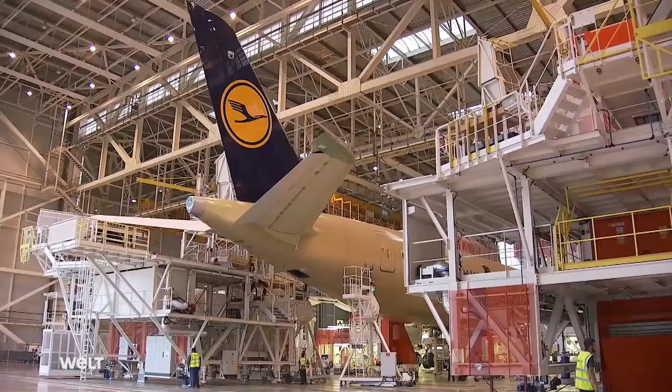Air travel has become an integral part of our everyday lives, connecting the people on our planet. For some years now, competition among airlines has been increasing, competition in which modern super airliners play an important role. The Airbus A350 is one such super airliner. Germany's largest airline has already ordered a significant number of these new long-haul aircraft. But can the airliner meet the high expectations?

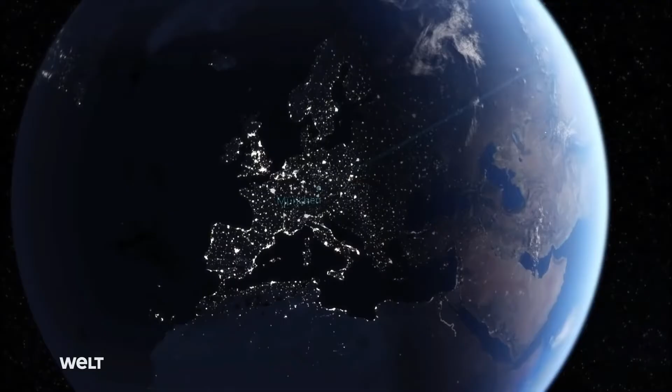The A350's first official flight goes from Munich to Hong Kong. The high-tech jet now has to prove itself under real conditions, a direct flight and a stress test with a duration of 12 hours. It's the most modern commercial airliner on the market.

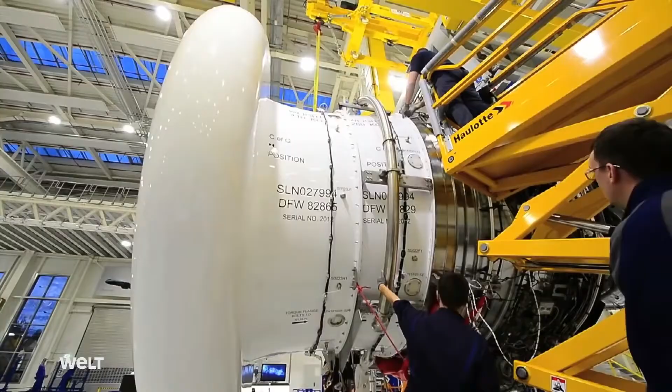The engines from Rolls-Royce have been completely redeveloped and enable the aircraft to carry out extreme flight maneuvers. We'll be pushing the aircraft to its limits here. On a test flight, the new A350 is rolled to a bank angle of 67 degrees.

There are also improvements for the passengers. More space and larger HD monitors are just some of the features. But the current super airliner from Boeing also has a lot to offer: new, larger windows and a completely new lighting concept for passengers on the 787 Dreamliner.

London to New York in only 3 hours, possible only by flying at twice the speed of sound. But that's only the beginning. In the near future, even flying drones will help alleviate the traffic chaos in our cities. And developers are looking even further into the future with their concept plane, an example of what the future could look like. This future, we will build it together.

The super airliners for the new millennium are ready to hit the skies.

The Airbus factory in Hamburg. The city on the River Elbe is the third largest construction location for civil aircraft in the world. Around 12,000 people work here in development, design, and final assembly. Besides other aircraft, 2 super airliners are being produced on the 19-square-kilometer site.

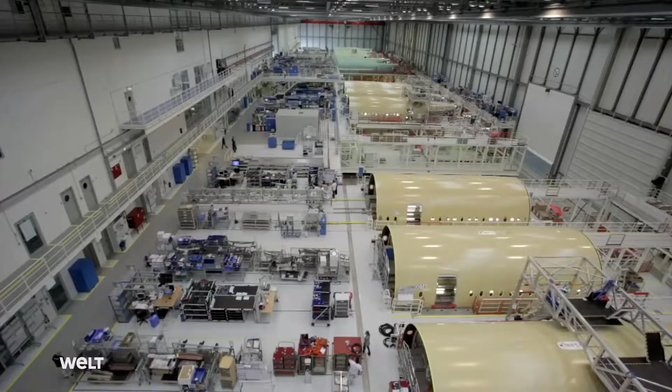The biggest passenger aircraft in the world, the A380, and the new long-haul jet, the A350. There was even a new assembly hall built especially for their manufacture. Here, the mechanical and electrical systems are installed for 2 fuselage sections: the forward section, which starts behind the cockpit, and the rear section behind the wings.

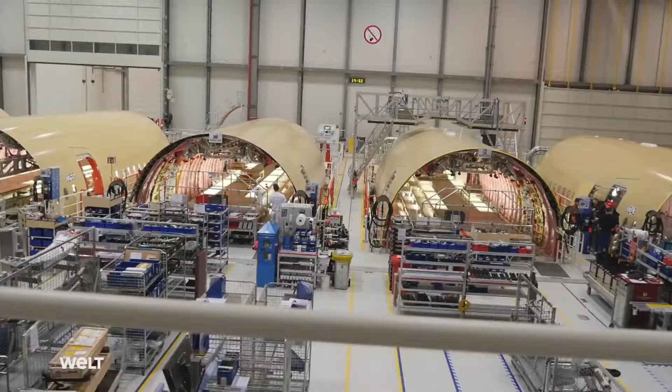At first sight, the individual fuselage sections all look the same, distinguished only by their different production numbers. Everything runs according to a fixed assembly schedule, which begins with delivery of the front fuselage section. The staff here refer to this as the barrel, in which they gradually install the various systems. That is now much faster than in the old assembly hall thanks to the new construction method. For the fuselage and wing structures, more carbon fiber composites are used than in any other commercial airliner.

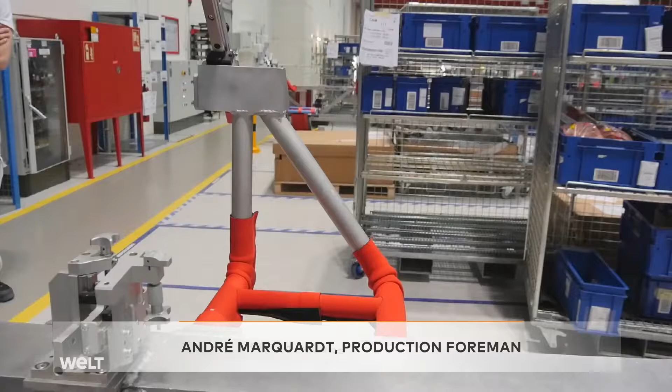After only 12 days, one fuselage section leaves the Hamburg works and is flown to Toulouse by the Beluga transporter. This production speed, however, is only possible by using the assembly method known as module integration. That's a very special assembly method here in aircraft construction. The A350 is currently the only program carrying out installation this way in the entire Airbus group.

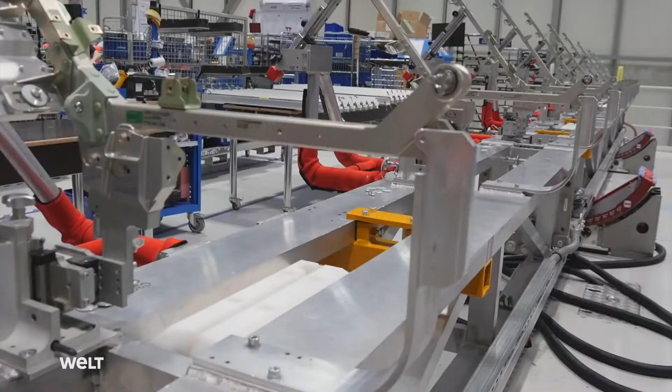In these frames, cables are laid, air conditioning ducts mounted, and small control devices installed. The benefit is that there's no more overhead work, as the modules are only installed in the cabin ceiling at a later stage, a great relief for the technicians.

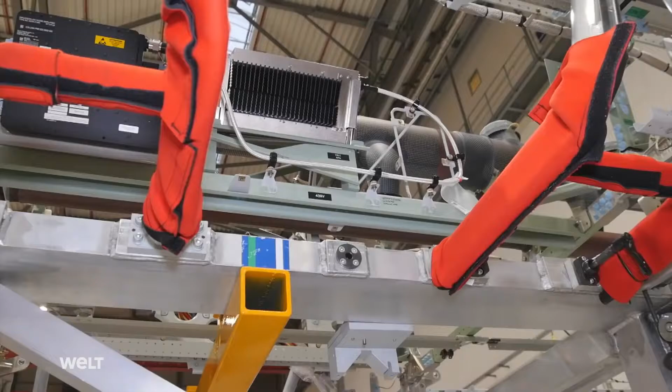However, everything is still installed by hand. The cables are bundled into so-called harnesses and then ducted before these harnesses are also installed into the modules. Each individual line is then checked once again by technicians before being installed in the barrel. If everything is okay, green labels are attached with the letters GTI printed on them.

GTI stands for Ground Test Instruction, and there's a precise definition for the way we have to check our contact resistances and the rest of the electrical equipment. Electrical resistance is measured at various points with the help of a measuring device. This resistance measurement is extremely important for safety during flight operations.

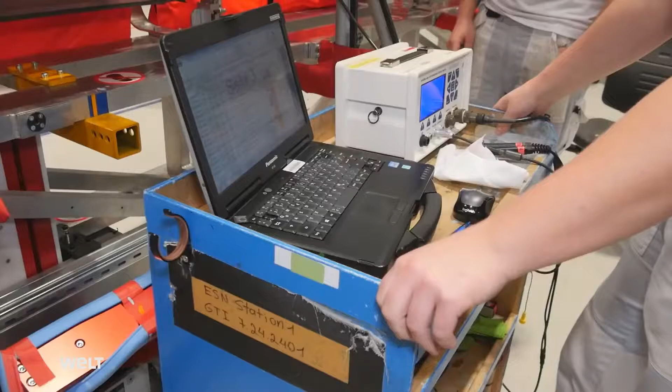If the contact resistance or general resistance is too high, or the currents flowing over them get too high, as in a lightning strike, it would lead to a lot of heat developing here, and that's definitely not something we would want in an aircraft.

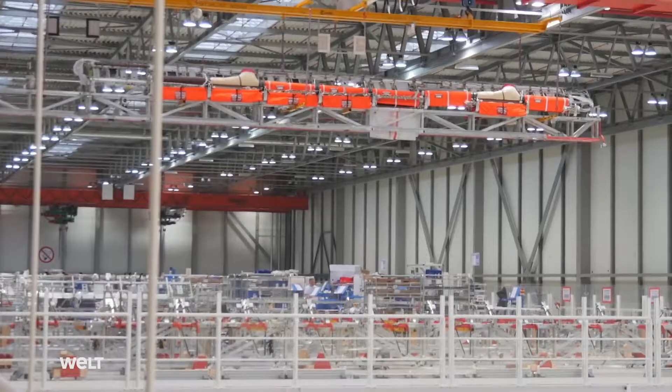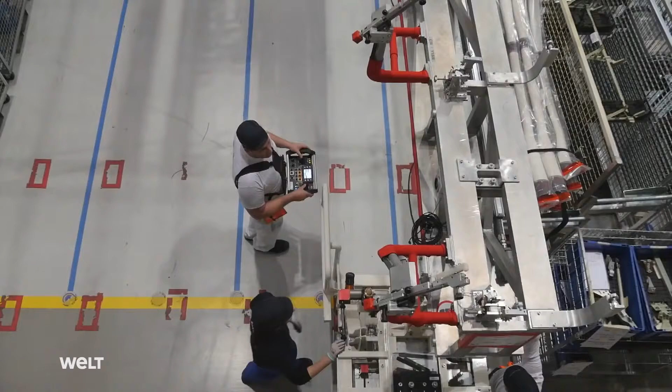Once the module has been assembled, it's carefully transported by crane to the A350 fuselage. The time saved by this new assembly method is enormous. The manufacturer now delivers more aircraft than ever before. A350 production alone now sees 10 aircraft completed every month. This is also due to the passenger cabin being assembled parallel to the fuselage, wings, and tailplane.

Now the retaining bolts are removed and the module is slowly edged towards the fuselage.

There are currently 3 versions of the aircraft available. Here, the middle version, the A350 XWB-900, is being built for Lufthansa.

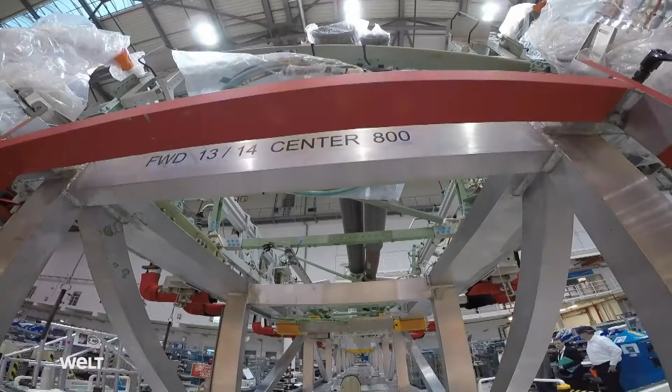The module is slid into the fuselage on a rail. Nothing must go wrong now. The slightest error could bring the entire production to a standstill. The technicians are all highly focused because, after all, the safety of future passengers depends on this.

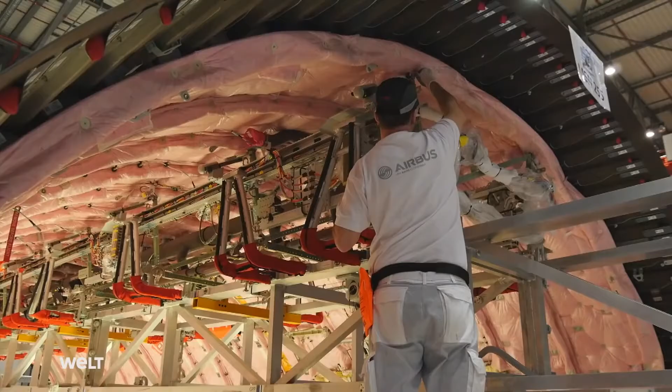Minor deviations in the height of the module are corrected using adjusting screws. Hundreds of cable harnesses are still hanging down from the module ceiling. They will soon all be laid individually by hand.

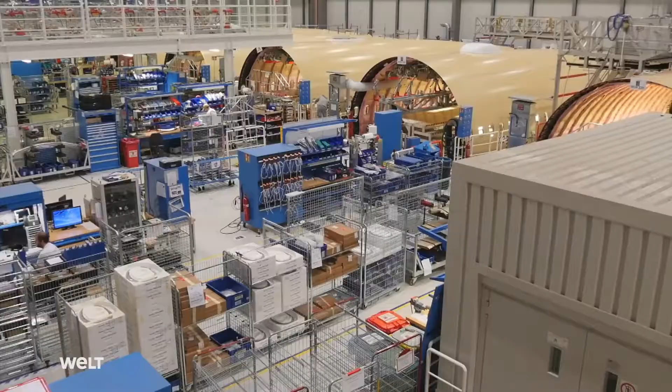While work goes on in the upper section of the cabin, in the lower section everything is finished. We're here in the plane's cargo section, where all kinds of systems are installed that passengers don't get to see. In the rear section, there are the fresh and wastewater tanks.

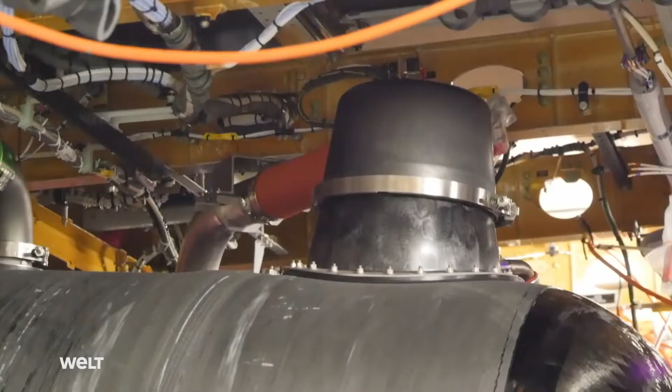There are 2 freshwater tanks installed here, a larger and a smaller one. The larger tank holds about 800 liters and the smaller one around 600 liters. We allow about 40 liters per passenger.

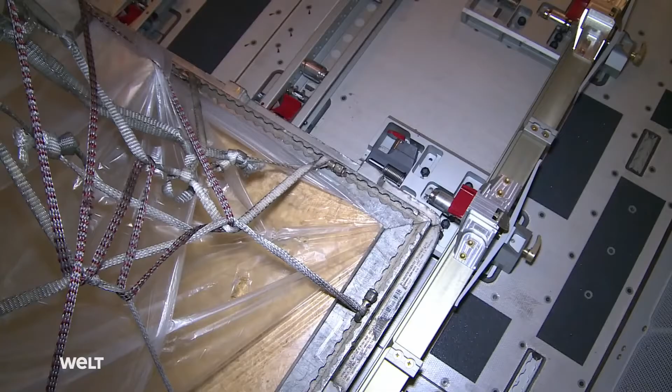Under this floor paneling is where the A350's oxygen supply is installed. The supply lines are well protected in the middle of the fuselage. Here too is all the cabling for the cargo system. This automatically guides the freight containers into the fuselage and ensures the load is correctly positioned.

Here we've installed the cargo loading system. These are the roller conveyors. They consist of different compartments where the luggage or the freight can be loaded onto, and so it arrives at its destination safely without slipping.

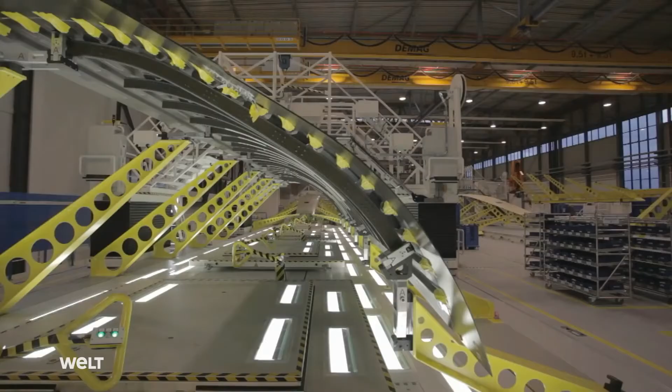After 15 years of development, the A350 will now succeed the Airbus A340 as the new super airliner. The way it's produced is also completely new. New materials demand new manufacturing methods. Special bolts are used to connect the fuselage sections.

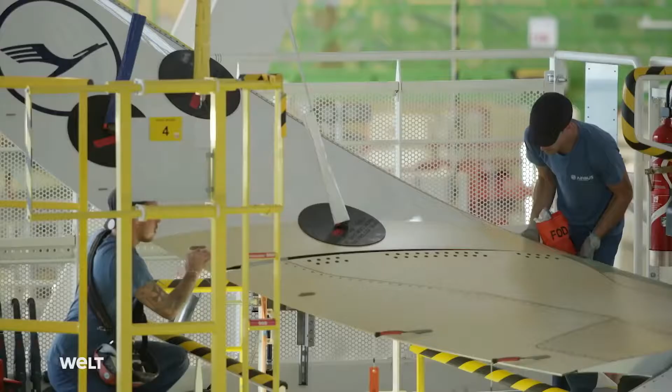The A350 also has reinforced high-speed wings. They are made of CFRP, a carbon fiber reinforced plastic, making them suitable for higher speeds. The extremely smooth wing surface the CFRP creates results in less air turbulence, which in turn means reduced air resistance and consequently more lift. This guarantees greater stability and at the same time 4.5 tons less weight.

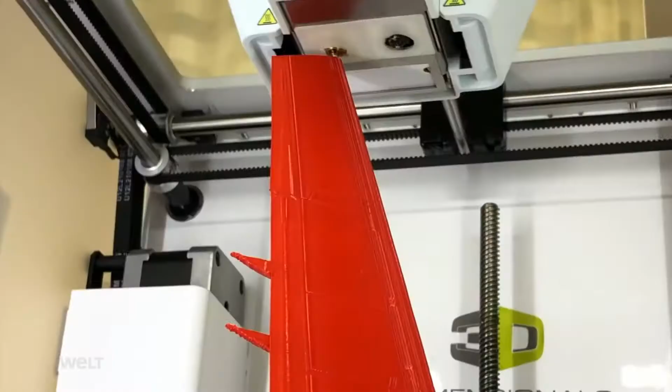To build these wings, a completely new process is used. Similar to the principle behind a standard 3D printer, the wings are built up layer by layer. Here, a small model of an aircraft wing is produced, but in the plant at Stade near Hamburg, the upper level of a full-sized wing is printed with the help of a giant roll of adhesive tape.

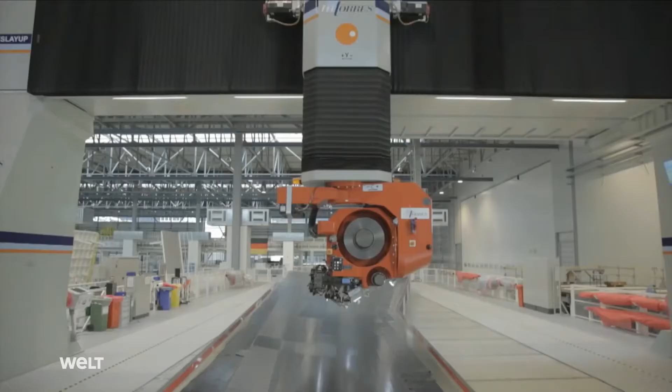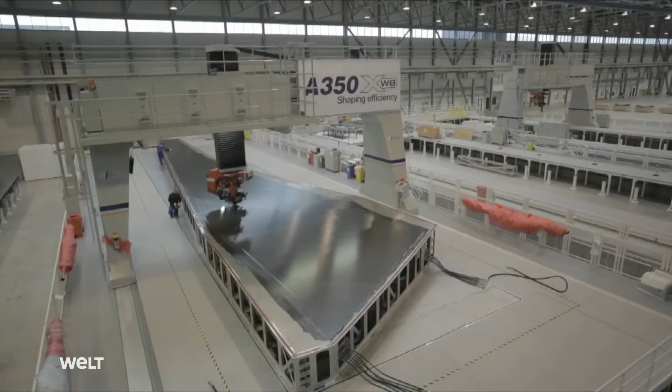On each of its long sides, there are 12 rotating spools which unroll black strips of CFRP. Large aircraft manufacturers are increasingly using this material to save weight, kerosene, and money. CFRP is stronger and easier to work with than aluminum or other metals. It's also much lighter. In the development of the new super airliner, cooperation with the various airlines is extremely important.

It's a continuous process. Based on our experience in daily scheduled operations and close contact with the manufacturers, Airbus, we help to develop new solutions for future aircraft, which can then later be found in our own fleet.

All A350 parts manufactured in Hamburg are flown to Toulouse for final assembly. This is where the super transporter Beluga comes into its own. The Beluga is the aircraft manufacturer's backbone. It can carry up to 47 tons of freight, the equivalent of about 10 fully grown elephants.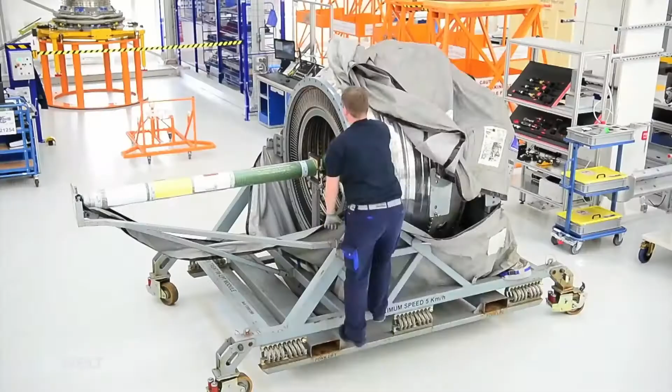Here, too, most of the work is carried out by hand. Around 70 highly qualified engineers and technicians work here, putting together thousands of individual pieces like a huge 3D puzzle.

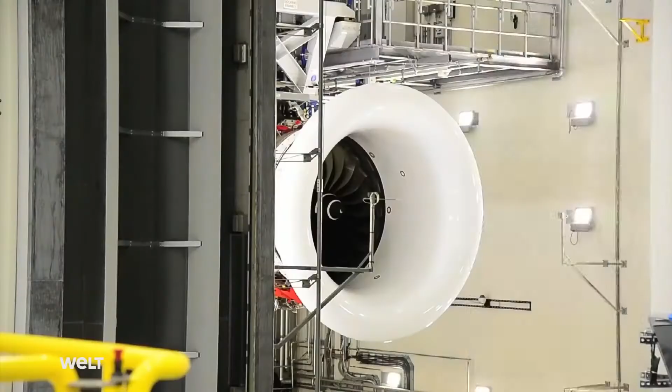After final assembly, the engine is tested thoroughly. Up to 40 different tests can be carried out in this 7,000 square meter facility. Only when all of them have been completed successfully is the engine transported to the Airbus factory in Toulouse.

She's been given the name Bonn. The technicians have just installed the improved sharklets. Their special shape causes less turbulence and so reduces air resistance. The air flows more evenly past the wingtips, which increases the plane's range and reduces its fuel consumption.

Calculated in terms of consumption per passenger over 100 kilometers, the new A350 uses just under 2.5 liters, which at the same time enormously reduces its CO2 emissions.

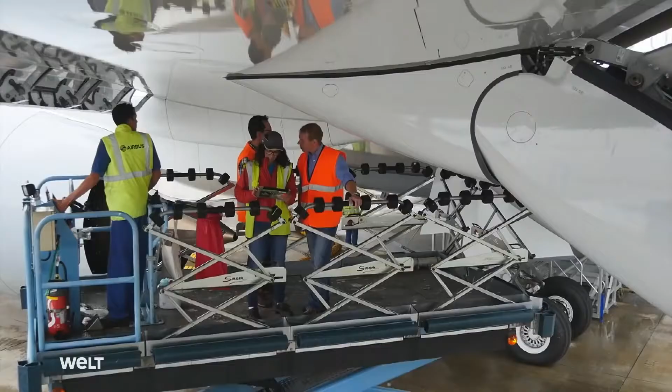In Toulouse, in the pouring rain, the final checks for the new airliner are underway. Everything is inspected and documented meticulously. As the machine is being delivered to the airline today, its own technicians are examining it particularly closely.

I'm in charge of quality check for the A350 here at the final assembly line and for deliveries. And you've just seen me up on the fin where I checked sealants and paintwork to see if anything's flaked off here and there.

Minor problems are marked with green adhesive tape. At a price of €265 million, nothing is left to chance. To assess the paintwork better, it first has to be wiped dry. A slight scratch is visible on the back of the rudder. Nothing serious, it's marked and will be polished out later.

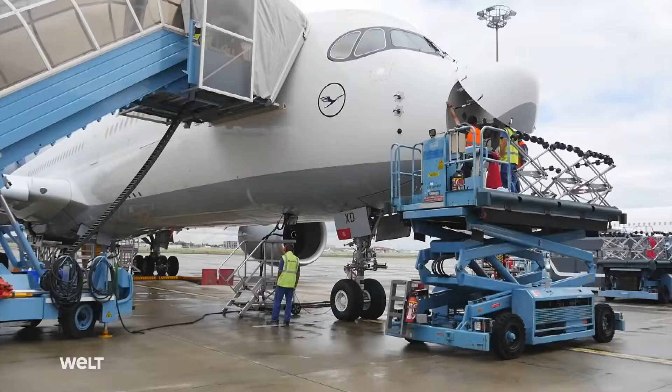Meanwhile, in the nose cone, the plane's radar system is being checked. It is located in the cone directly in front of the cockpit and is essential for information on weather conditions and airspace control. The inspection is completed and the test crew are very satisfied.

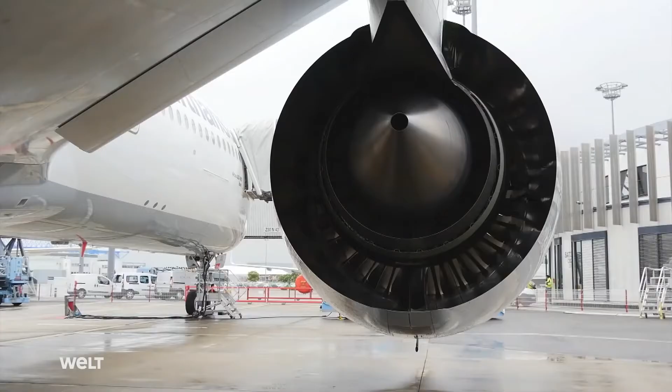The aircraft is now ready for takeoff. At the briefing, the planned test flight is now discussed down to the most minuscule detail. I'd suggest, first of all, that we do a pull-up, plus 0.5 G. Yeah, I got that. This particular maneuver briefly creates weightlessness inside the craft.

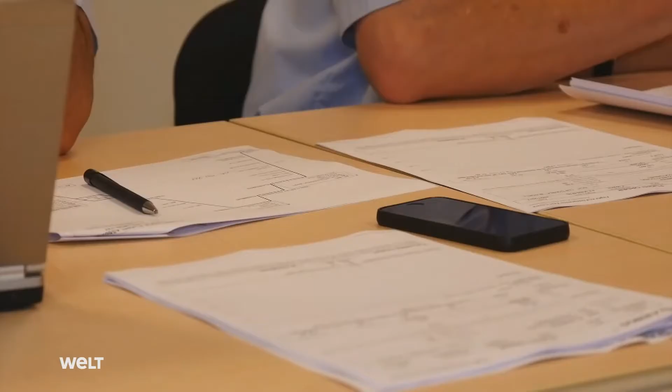Then they plan to roll the plane over on its side. A lot depends on the weather, which currently doesn't look too good in Toulouse. Benna Opsmeier is the captain on the flight and has years of experience. Taking account of the weather conditions, the flight plan is modified slightly so that all the tests can be carried out.

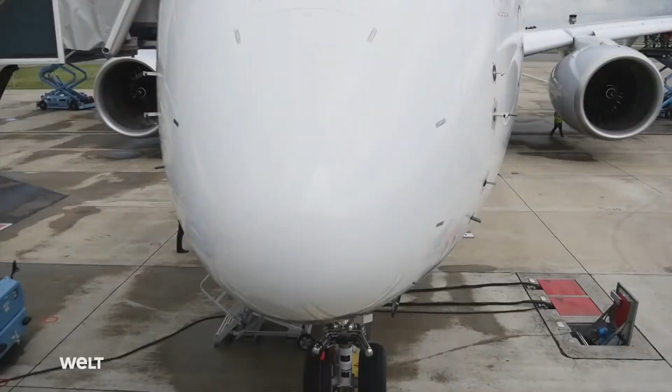This test flight is all about flying to the aircraft's limits, checking the so-called protections, the safety systems. An aviation engineer is also on board. My role on board is the flight test engineer and the test conductor, and the one guiding the sequence. An important task for the test flight ahead.

The pilots are ready and start preparing the A350 for takeoff. This test flight is also the acceptance flight. Only if everything goes smoothly and no major malfunctions or problems occur will Lufthansa take the aircraft.

The cockpit design has changed slightly and is now a two-person glass cockpit. A new feature is the mushroom-shaped mouse control handrests, which are also used in the A380. The display is made up of 6 38-centimeter LCD monitors. The content can be selected freely by the pilot.

The aircraft slowly moves off. Everything looks good, and the pilot gives the order for takeoff.

While the landing gear is still being retracted, the first readings come through. Engine performance, speed, and cabin pressure are all within the normal parameters. The new Rolls-Royce engines and optimized aerodynamics reduce the aircraft's noise footprint by 30%, putting it well below the legal limits.

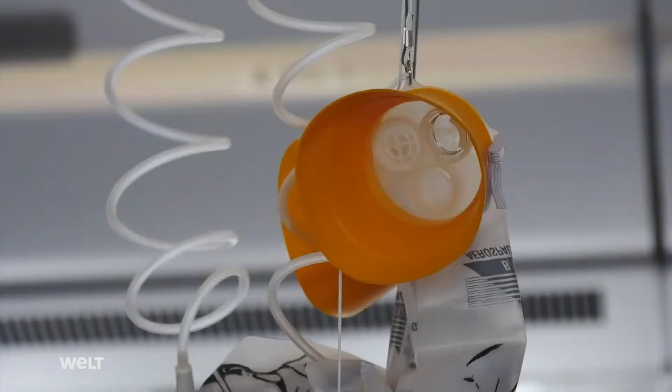In today's test, only one of the many oxygen masks is released. The others have already been tested and found to be working perfectly. In an emergency, the aircraft's automatic system takes over.

All the tests have been completed successfully and the team returns to Toulouse. After a 2.5-hour flight, the aircraft touches down at the company airport. A total of more than 40 different tests and maneuvers have been carried out.

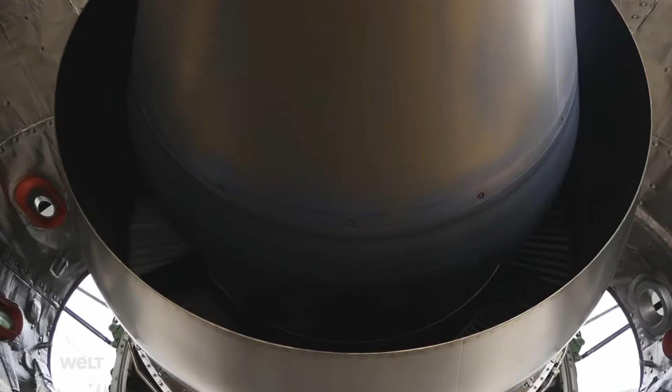The crew is satisfied, and the Bonn can be taken over by Lufthansa. However, there are still a few minor issues to be sorted out. After landing, everything is carefully checked and examined once again. To cool the machine down quickly, all hatches are opened and covers removed. Time for the test crew to evaluate the data and make a final assessment.

There's always a great feeling when you see the plane flying at its limits. Martin flew it really well again, along with Wolfgang Abtsmeyer. It's quite frightening when you're at an angle of 67 degrees and you can see France flying by down below. That's what makes for really excellent flying with this aircraft.

Competitors Boeing are also relying on high tech and have built their own new super airliner, the 787 Dreamliner, which also boasts lower fuel consumption thanks to modern materials. These advances increase efficiency, simplify the operation of the aircraft, and provide noticeable improvements to the passenger's experience.

One of these innovations are the 787's new larger windows. Most people are going to say, I really like the windows. And they will, and that'll be true. But there's going to be a lot more going on besides the windows that you can't even see that we did on this airplane. And you're just going to feel better, and you're not going to know why.

At Boeing, too, all aircraft are thoroughly checked and examined before they are delivered. The 787 has enhanced stall protection, which allows the pilot to have the full lift capability of the airplane at their command. That underlies the overall Boeing philosophy of having the pilot in full command of the capability of the airplane.

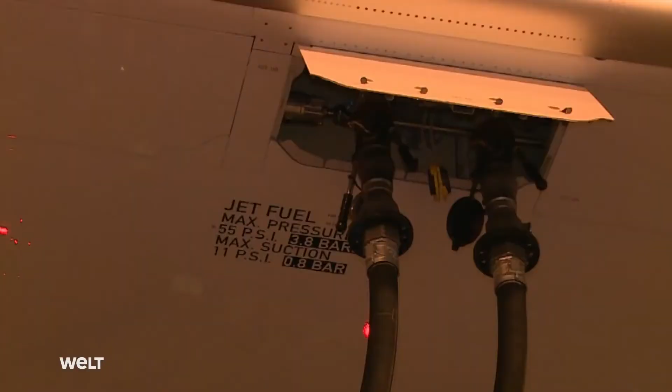Fueling is already underway. Before takeoff, Captain Jasper carries out the so-called ground check, in which he personally inspects the exterior of the machine once more. Obviously, I can't see inside the system, but there are certain places you can look at to make sure they're in order, indicating the general condition of the aircraft.

The A350 Bonn is ready for takeoff. The pilots take up their positions in the cockpit. For safety reasons, there are always 3 pilots on long-haul flights who alternate regularly.

The final provisions are stowed away in the cabin. It's all brand new on this aircraft. You notice that as soon as you come on board, everything smells new. We're very proud that it's the staff based in Munich who are the first to fly on this plane.

And now the first passengers also come on board. The flight attendants have to deal with a completely new system. Though it's all been practiced in advance, things are often different in reality. Some things are not where they should be, but in general, everyone is satisfied.

It's definitely very pleasant, there's more space. Of course it's a change from the A340, because there are 2 galleys here now - at least in the new business class. The caterer has delivered the food, and the cockpit crew is ready for takeoff. The passengers are on board, we're excited, the doors are closed, we're taxiing, and I'm really looking forward to our flight to Hong Kong.

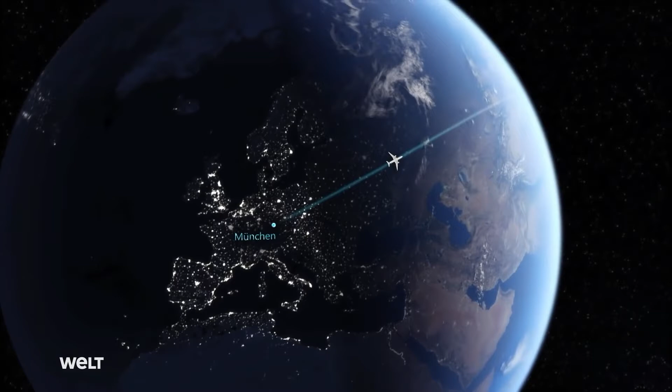With 325 passengers on board, the Bonn taxis to the runway and sets off from Munich to Hong Kong. On her first regular flight, she will cover some 9,000 kilometers without a stopover.

Speed has always fascinated people. Ever faster cars and high-speed trains seem to make distances shrink. In commercial aviation too, things are happening. Boom Industries is building an aircraft to fly from Munich to Hong Kong in just 4 hours.

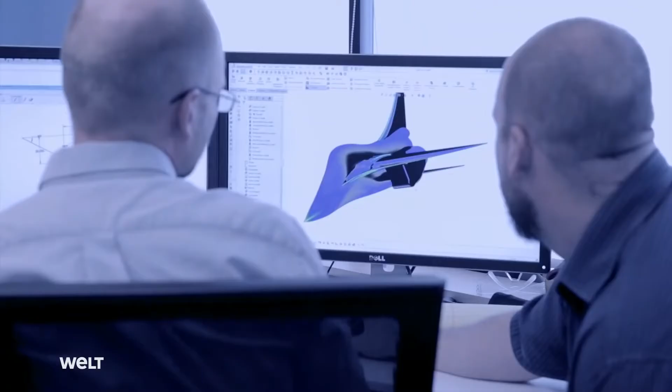To accomplish our goal of affordable supersonic travel, we challenged our engineering team to create a design at least 30% more efficient than Concorde. Concorde was the world's first supersonic passenger airliner. It went into service in 1976, covering the Paris to New York route in less than 3 hours.

After an Air France Concorde crashed in July 2000, the service was discontinued. For the first time since the Concorde, supersonic passenger flights could soon be in the skies again.

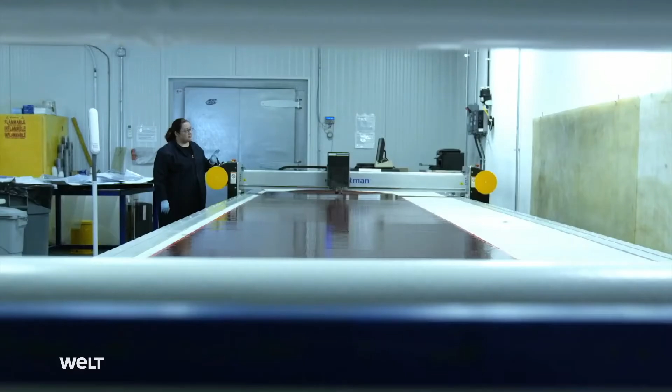The U.S. company Boom believes new materials are the key to achieving this. Carbon fiber composites allow us to realize the aerodynamic design with a strong, lightweight structure. To create a carbon fiber part, we first start with a high-precision mold, either CNC machined or 3D printed.

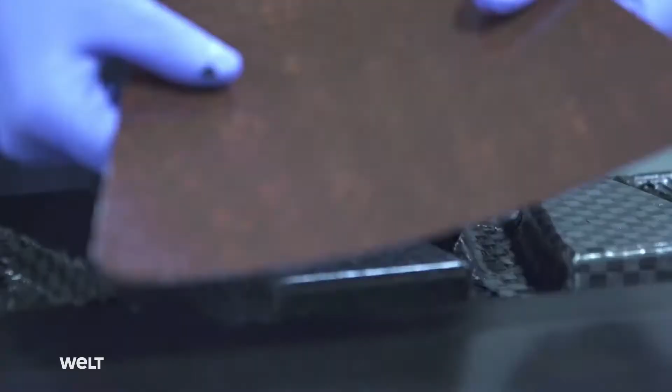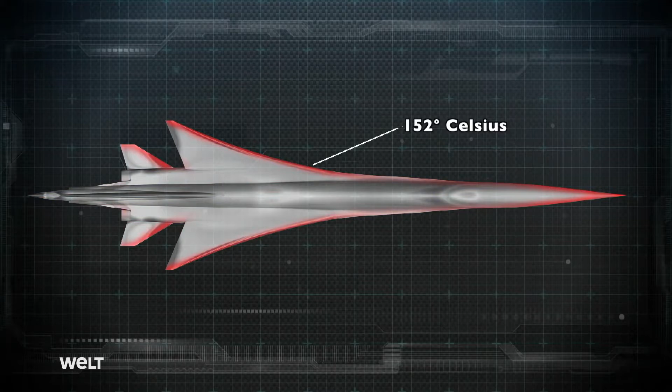We then apply layer after layer of carbon fabric and resin to the mold. Finally, each part is cured in an oven or autoclave under vacuum at temperatures of up to 450 degrees Fahrenheit. Cruising at 1,451 miles per hour, the nose and leading edges of the aircraft can reach temperatures of up to 307 degrees Fahrenheit. These carbon parts outperform aluminum at the high temperatures of supersonic flight.

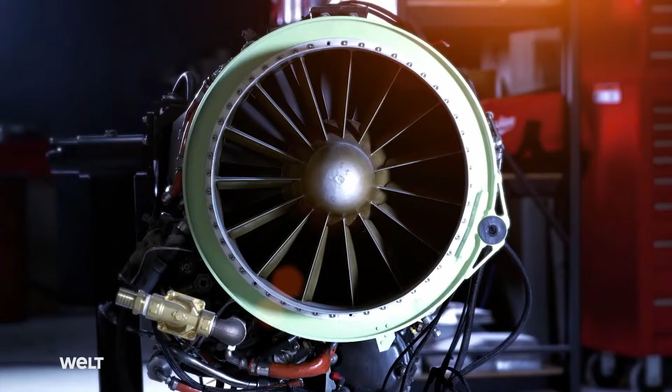The propulsion system is composed of a variable geometry intake system and an efficient turbofan jet engine. Our engine is based on the same technology that powers modern subsonic aircraft, but with a customized fan and a variable geometry exhaust. Lastly, we use 3 engines for added reliability and safety - 2 engines under the wing, and a third in the tail.

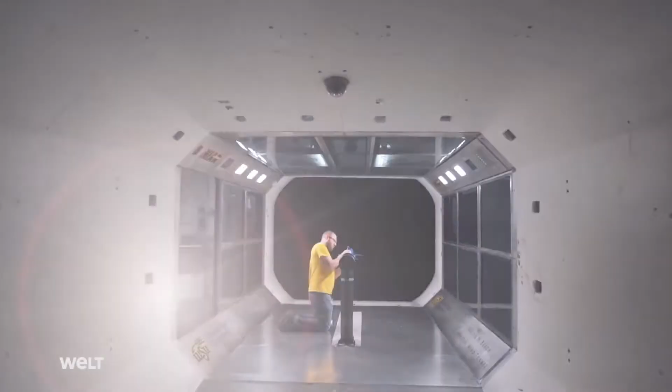Before actual construction of the new super airliner can begin, a lot of testing has to be carried out in the wind channel. A small model is built and covered with different materials. This is done to determine the behavior of different materials under strong wind resistance. If it is torn off or deformed, a better material has to be developed. Testing, however, is going very well.

With a flying time of only 3 hours from London to New York, the engineers decided against seats with a recliner function, preferring instead modern communications technology, ideal for business travelers.

On its maiden flight to Hong Kong, the A350 isn't quite as fast, flying through the night at 950 kilometers per hour. We're here in the larger central galley.

The A350 has a few new improvements which other airliners don't have. There's a refrigerator where passengers can help themselves. We have a few environmental innovations for disposing of leftover food and drinks, and we also have a self-service area to make sure our guests are always provided for.

The air on board is also much better, a luxury that all classes benefit from. This makes the cabin pressure feel lower, and as this is a long-haul aircraft, it contributes to making the journey in the A350 feel more relaxing.

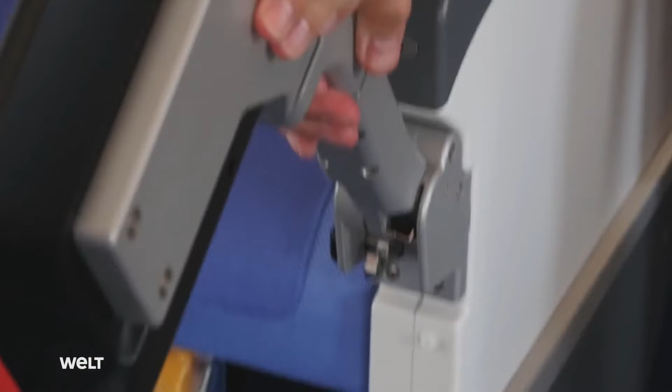There have been a few changes to the seats too. They are wider and more comfortable throughout the entire aircraft. Even in economy class, new standards of seating comfort now apply. The high-quality mounts and brackets here lead to significantly less vibration in the seats themselves.

We're in economy class today. This would have been business class only a few years ago. If you look at the seat, we have 18-inch wide seats, better than any other aircraft flying in the skies today. 17-inch seats have been standard in many aircraft up to now - that's a little more than 43 centimeters.

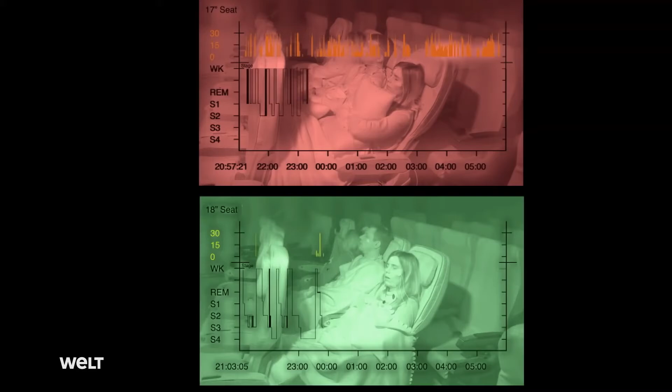The 17-inch seat is the seat that prevents you from movement, it prevents you from getting comfortable during that flight. Our industry is changing, and the needs of passengers are changing as well. A study has shown that the sleep phase for people in 18-inch seats is much longer and more intensive than in 17-inch seats. As the research has shown, 1 inch makes all the difference.

Onboard comfort has also improved for the A350 crew. They now have a proper sleeping cabin for up to 6 people.

And this is the so-called purser bed for me and my purser colleagues. That's because it's closest to our interphone, and the purser is the one in charge of communication, who has to make the phone calls. This way you can make your own little comfort zone.

Another super airliner is the Boeing 777. Like the A350, it's used by all the leading airlines. The cabin equipment is modular and can be converted as required. In the 777, wider seats and improved cabin air are important features.

Many airlines have meanwhile placed orders for a special version of the Boeing 777. Among them, Germany's largest airline too.

As a freighter, the 777 can really show off its capabilities. In this class, hardly any other plane can touch it. It's one of the most efficient aircraft in the freight sector, the non-plus ultra in terms of what money can currently buy on the market.

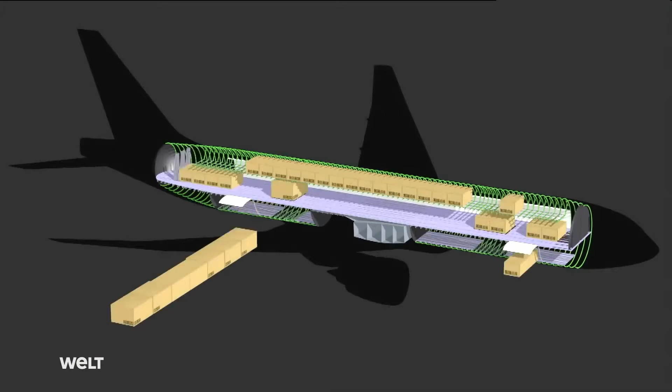The heavy containers are first transported to the upper deck of the hold by a sophisticated elevator system and then distributed evenly across its entire area. The procedure continues on the middle deck. Only at the end of the operation is the lower deck filled.

Behind the cockpit, there's a small kitchen through which the crew members can access the hold. Captain Frank Lumnitzer checks the cargo. There's not a lot of space left for him to get through. Anyone used to a passenger cabin will find this a little unusual.

We've loaded 98,700 kilos of freight. I don't know yet the specifics of the cargo. I'll get that afterwards from the handling agent. Ultimately, it's freight that's either valuable or that has to be delivered punctually from A to B.

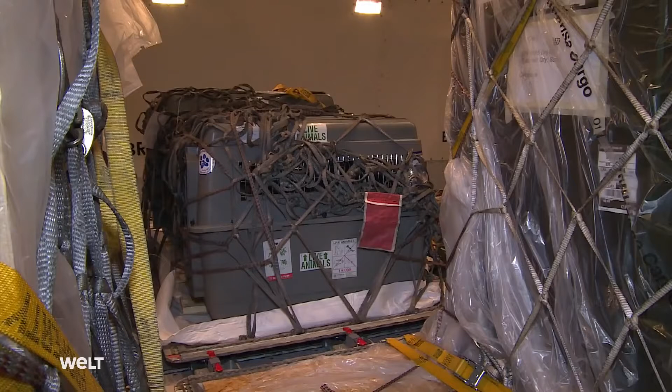In here, 2 Greyhounds are waiting for takeoff. The freight documents have now arrived and are all in order. So now to the external inspection of the 777.

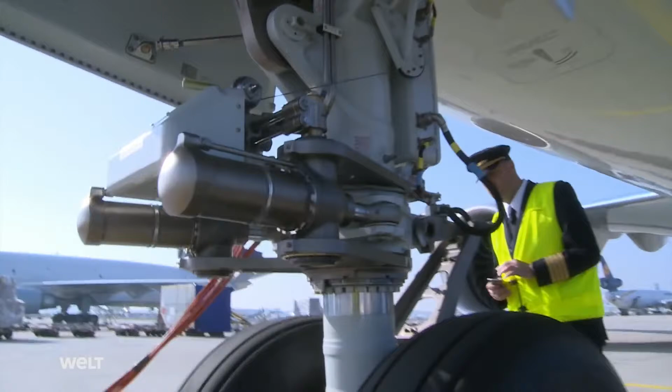A routine exercise for Captain Lumnitzer, who is flying the aircraft to Chicago today. Our technicians have prepared the aircraft, and it's now down to me as captain to get my own impression of the condition of the aircraft.

Boeing 777s are equipped with the most powerful engines available in commercial aviation. They have a diameter of well over 3.5 meters and generate thrust of over 110,000 pounds. What makes this General Electric engine so outstanding is a special kind of air compression.

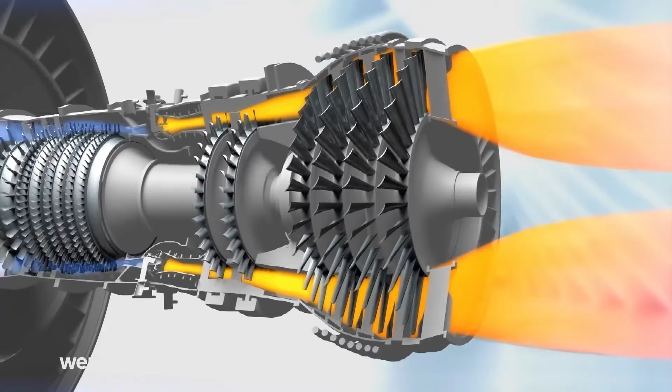Air is continuously compressed over a number of individual compressors, also known as fans, before it's mixed with kerosene. This mixture is ignited and drives the turbine. The turbine exhaust then provides additional thrust and turns this engine into a super engine.

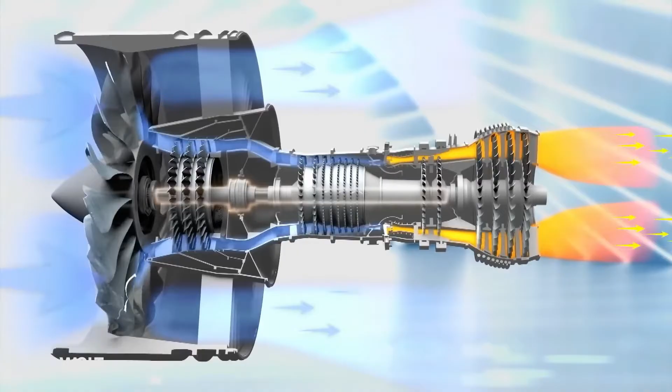The Boeing 777 is now ready for departure. So, it's time to go. We're off to Chicago, and we want to be punctual. With a range of 11,000 kilometers, the 777 operates a network of almost 300 destinations from Frankfurt.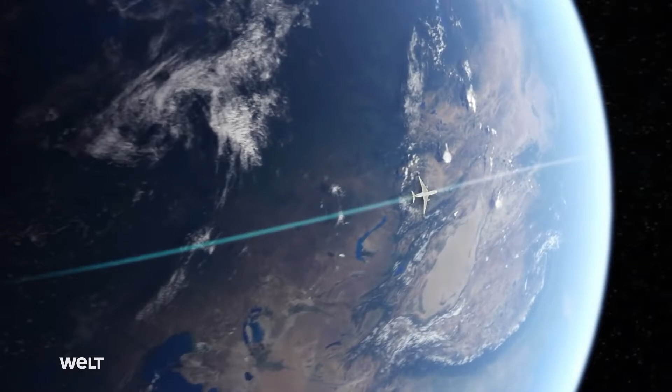Back on board the A350, Hong Kong is already drawing much closer. The plane is just crossing the foothills of the Himalayas. Below us, the 6-kilometer-high Tibetan Plateau, but the aircraft is running well, the systems are working excellently, and the fuel calculation we made in Munich seems to be working out.

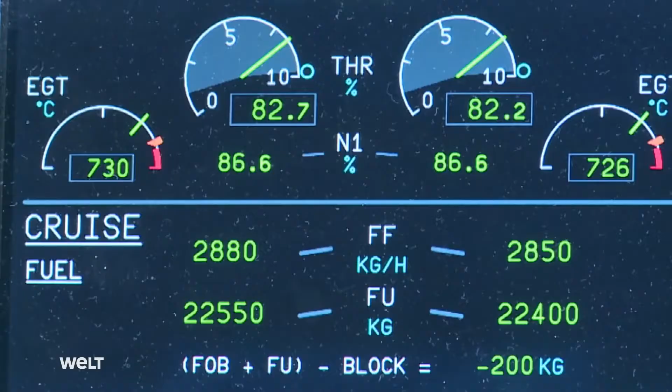We'll have enough reserves when we get to Hong Kong. All the other parameters are also keeping the pilots in a good mood.

This is the most modern commercial aircraft currently on the market, and you can really see that too. When I compare it with all the other models I've flown so far, like the A340 or the A330, this is a completely new generation, with a cockpit very similar to the A380. That's due, amongst other things, to the mouse control and freely assignable monitors.

The automatic height control for both aircraft is in the middle of the control unit. There's also a kind of tablet on each side of the cockpit on which the pilots can look at map material. The aircraft now begins its descent. The map of Hong Kong Airport has been loaded to prepare for this.

As expected, the aircraft held up very well and flew reliably. We're now on our approach and will soon have completed 10.5 hours of flying. And of course, I'm looking forward to the landing and our stay in Hong Kong.

But unfortunately, the A350 has to take a slight diversion. The airspace over Hong Kong is so crowded that the aircraft has to circle amidst the clouds. Time for the pilot to switch to manual control. In the clouds, visibility is down to 0 and the pilot has to rely blindly on his instruments.

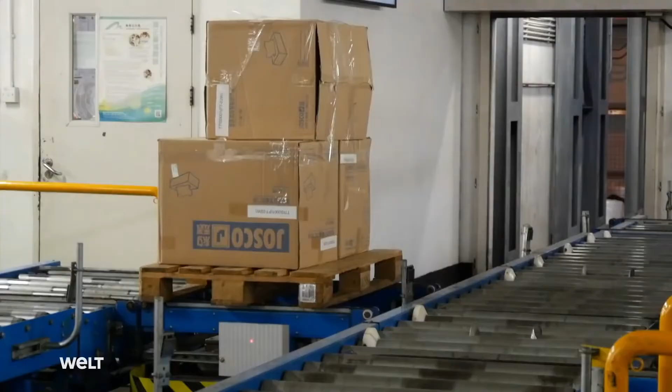Right near the airport is the base of LSG Sky Chefs. The catering business is a Lufthansa subsidiary and the second largest supplier of onboard catering services, with a worldwide market share of 20%. In 2017, the 35,000 employees produced around 696 million meals, achieving a turnover of 3.2 billion euro.

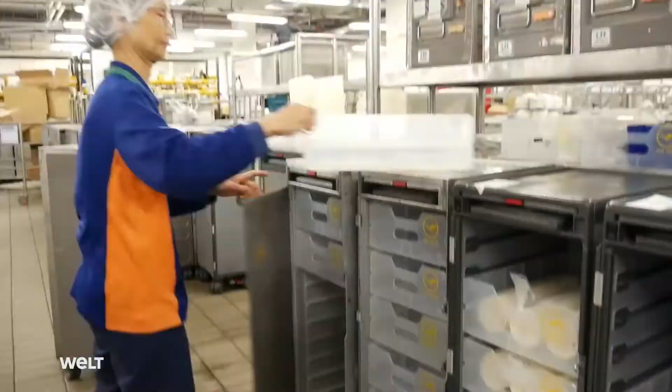The LSG Hong Kong warehouse has absolutely everything. Here, the catering for the return flight of the A350 Bonn is being prepared. The trolleys are still empty and have to be filled up with glasses, drinks, and snacks.

The packing list from Lufthansa indicates the part number, and we pack according to all the items here and also the quantity. Every day, cutlery for over 10,000 passengers has to be cleaned and packaged, all by hand.

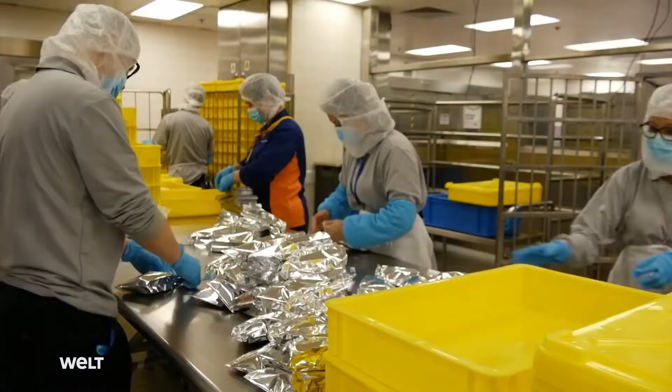Cooking for extreme conditions. At an altitude of 10,000 meters, the sense of taste is altered by low pressure and low humidity. The effect of spices is weaker. The chefs know exactly which strong flavored dishes bring the taste buds back to life.

Rolls and side dishes are freshly made and then individually packaged, more than 10,000 every day. The sauces are also a little thicker, so they won't be thrown off the plate during turbulence.

It's more challenging every day to be an executive chef here than at a hotel, because you need to satisfy so many different customers every single day. The chef is always there, keeping a watchful eye on the preparation of his creations.

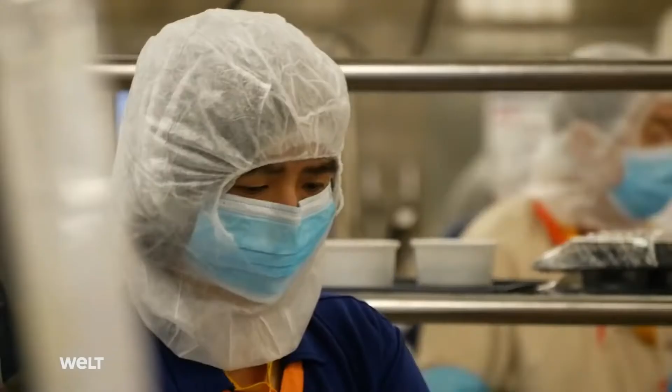I can cook everything alone for the airline, but I have a team. I need to make sure to bring what I want and my vision of the food I have for the customer, so they can produce exactly the same.

All the food for the return flight of the Bonn to Munich is prepared by 3 chefs at the same time, and this is just for the business class passengers.

The only way to prove yourself and to make your staff trust you is to cook, to show them your value, and to show them that when you say something, you know what you're talking about.

It's very important that no dish is higher than 4.5 centimeters, otherwise it will touch the next tray in the tightly packed trolley. So here, even star chefs like Michel Boussemont have to observe the limits dictated by dimensions.

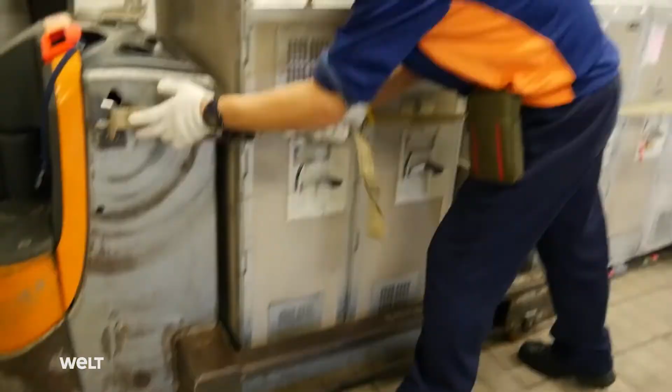The trolleys are packed and can now be loaded. Through long corridors, they are taken to the refrigeration carrier. In the control center, the orders and alteration requests are processed. With so many flights and meals, it's extremely important for the chefs to maintain an overview.

Let's say for Lufthansa, we have 66 business class. We produce for 66 business class. Maybe there are 40, we have 26 extra, but this is a top-up.

Safely packed onto the trolley, the Bonn's onboard refreshments begin their journey to the airport. There's still time. The Lufthansa A350 doesn't leave Hong Kong for another 90 minutes, so loading can be carried out as scheduled.

One trolley after another is loaded onto the refrigerated truck. Now they drive to the airport. The LSG refrigerator trucks dock onto the A350 and the food is unloaded.

Meanwhile, the crew is back on board the Bonn and is preparing for the return flight. In only a few minutes, everything is finished and the aircraft sets off for the runway. After her successful maiden flight, the A350 will from now on fly back and forth from Munich to Hong Kong on a regular basis.

Demand for modern airliners is growing. China, in particular, is ordering various aircraft models in increasing numbers. In fact, the People's Republic has only recently taken delivery of its 50th A330.

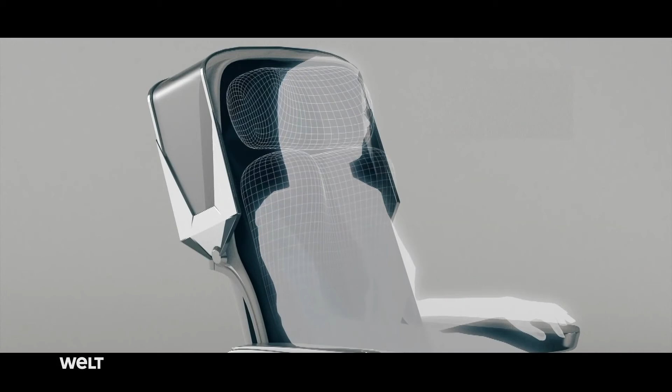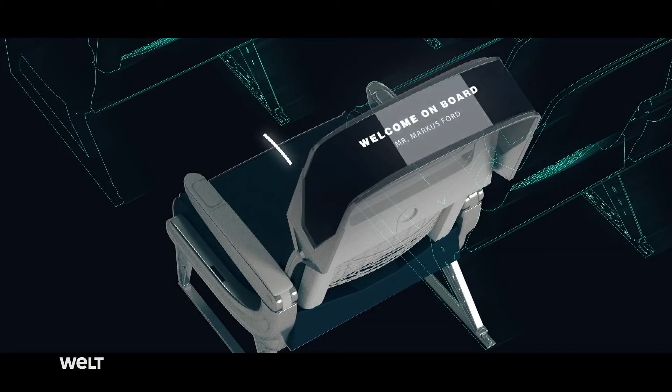On display in the so-called cocoon, the flight attendants can read any special wishes a passenger may have. When lowered, the cocoon greatly enhances passenger privacy. At the same time, its display makes the onboard entertainment system a very different experience.

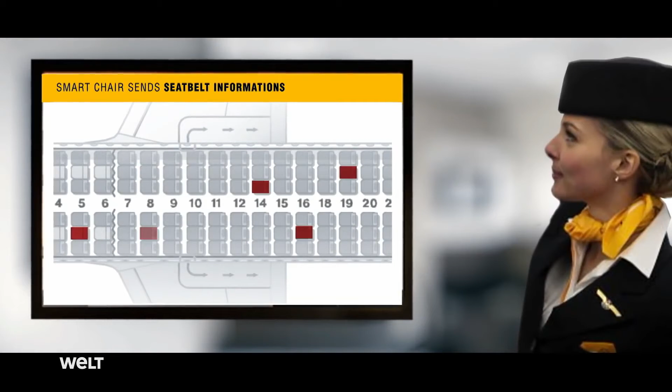During takeoff and landing, the seat automatically reports whether all passengers have their seatbelts on or not. The seat's colored light signals also make boarding and leaving the aircraft easier.

Basically, it's about technology, it's about research and technology, it's about investing in innovation, and it's about people. It's about getting and retaining the best talents, being able to attract the talents and the technologies of the future to help us build the aircraft of tomorrow.

A leap forward to the year 2050. What will the super airliners of the future be like? Transparent walls, bioactive seats, interactive onboard entertainment, and plenty of room for passengers could all become reality very soon.

This concept plane has already been developed and presented to the public. People really saw how the future could look like and also saw all the opportunities of the future. Virtual reality, playing golf, transparent windows. Interesting also question about social media.

Will Facebook replace actually meeting? And the answer is no. We need still to meet and make the journey as short as possible, door to door, including airports, immigration, check-in, not just the flight, but the complete experience.

There still seems to be a long way to go from the A350 to the concept plane, and the airlines are helping to speed up this development.